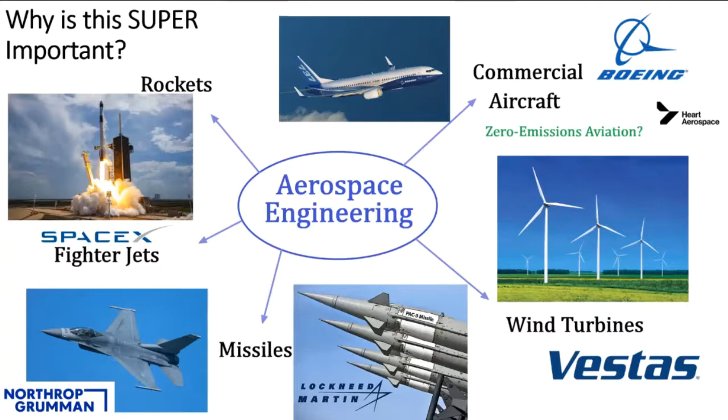Wright Stuff is an event in which you build a plane, usually out of balsa wood because it has to be light, and it's powered by a twisted rubber band. This twisted rubber band is called a motor. You can bring up to 2 planes, a couple calculators, tools, and the flight logs to the competition.

Then you launch your plane, and they will record how long it stays in the air, with the objective of making sure it stays in the air the longest amount of time. These planes are defined by several constraints, and if you do not meet them, you will be ranked last. So it's not as bad as being disqualified, but you must follow these constraints.

You are allowed to use essentially any material except for boron filaments. A boron filament is a type of very elastic and strong material, used mostly for the motor. The reason is that boron is toxic, so they want to avoid toxic things and ensure safety.

The plane must weigh at least 8 grams — I guess that's some sort of working constraint there. Ideally you want to minimize the weight of the plane, but they've set a minimum you can't go below. Similarly, they have defined a maximum limit on the length of the wingspan.

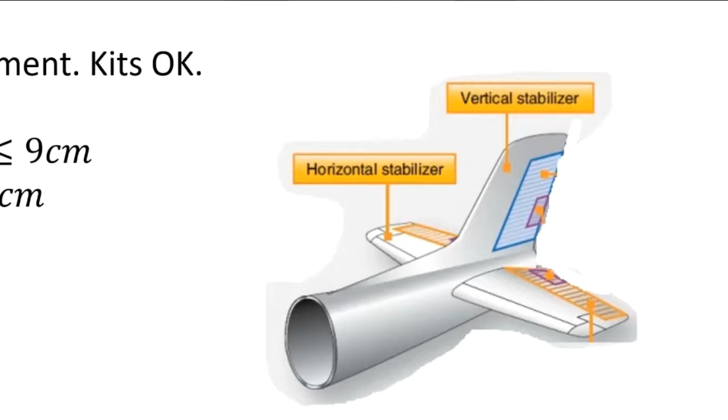There are similar dimensions for the stabilizer. What's the stabilizer? It consists of a small wing and a little rudder, or tip, that points vertically — they're called the horizontal and vertical stabilizer. I'll show you the purpose of these, but what you need to know is that the horizontal stabilizer can be no more than about 28 centimeters, and the vertical about 7 centimeters long.

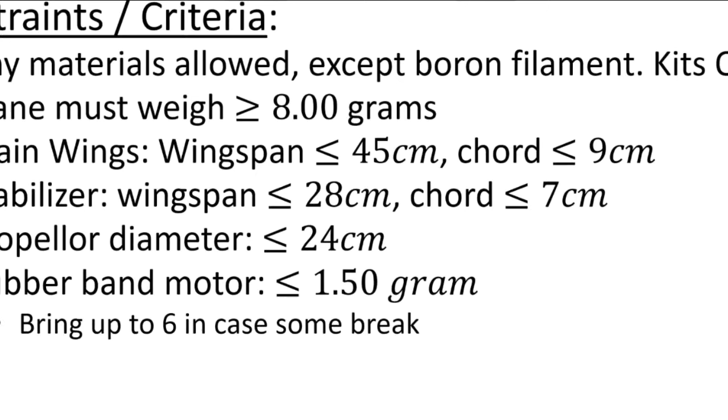The propeller has to be no more than 24 centimeters. Why? Because the bigger the propeller, the more powerful the airplane, so they set a limit to make sure it's not too powerful. Similarly with the rubber band: usually the thicker the band, the stronger you can twist it before it rips, so they set a maximum limit of 1.5 grams.

And you're allowed to bring 6 of these rubber bands in case one breaks. So that's fine.

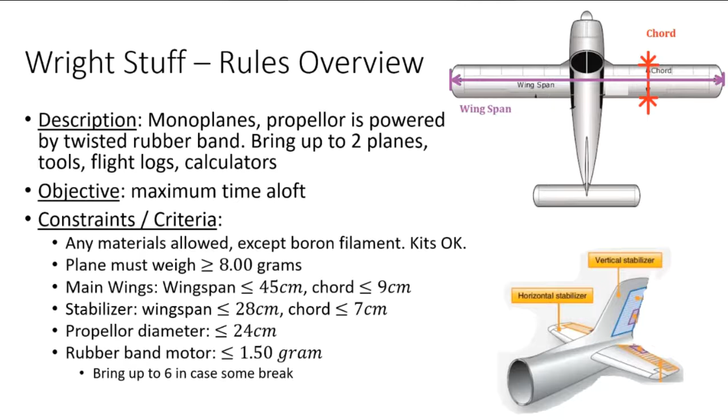If you've seen this picture from the previous introductory build event workshop — the way this airplane is powered, I'll remind you, is that you take a rubber band and twist it. When twisted, it experiences torsional stress and wants to release it. You hook one end to the motor, which is free to rotate around this bearing right here.

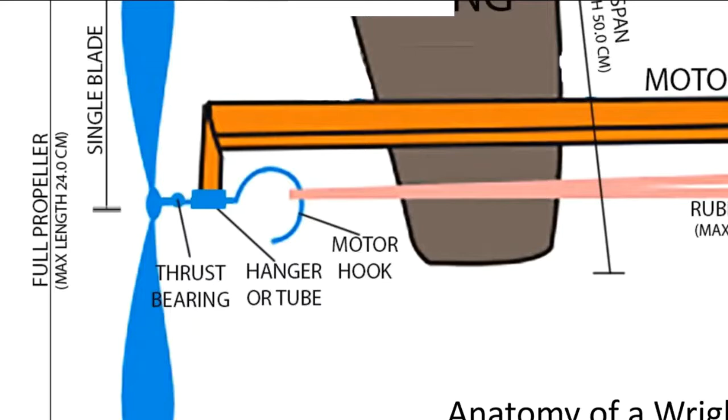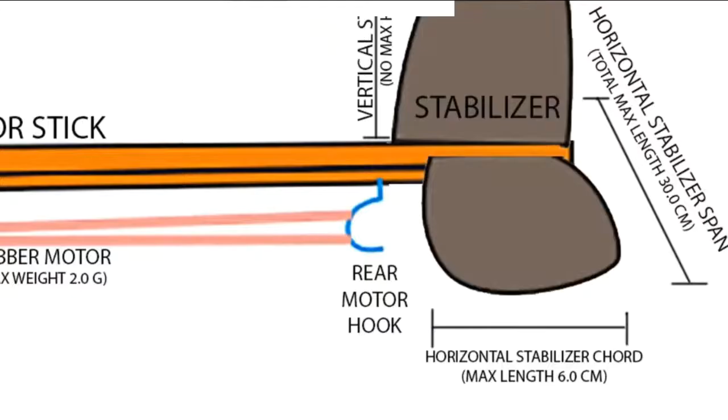But the other end, you hook onto a stationary hook, which cannot move. So you'll have rotation with respect to this hook of the rubber band. That will twist the motor and propel the aircraft forward as the propeller pushes air back.

So there's quite a lot of stuff going on. This picture is quite an oversimplification, but just take a look. This little blue region with the propeller, the thrust bearing, the hanger or tube, and the motor hook, looks like a lot of small details.

Are you sure you can make this yourself? And if you are sure, how about the propeller? Are you going to make that yourself too, or are you going to buy it? So what materials would you think you'd need?

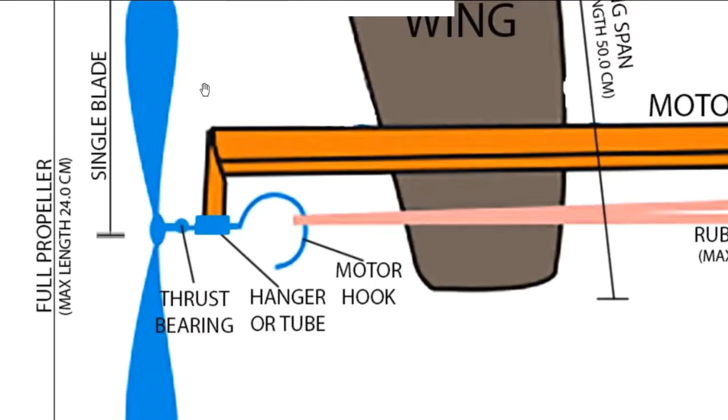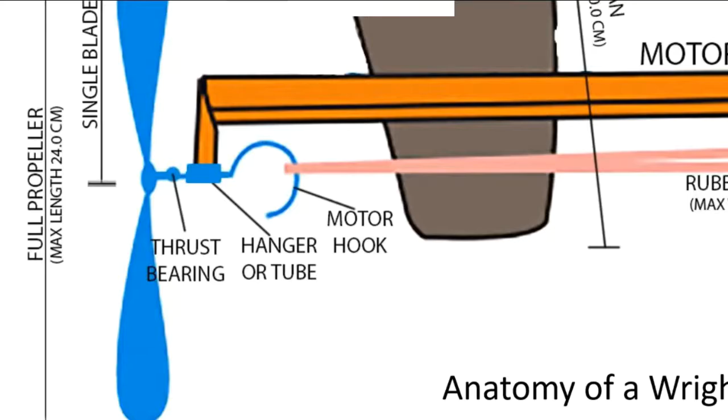Obviously we can't opt for a metal propeller. Even though it's durable, it will be too heavy. And maybe even wood is too heavy of a material to use for the main fuselage. So you run into all sorts of issues if you want to start designing this from scratch.

But fortunately, I guess this problem has been solved before. And what people who have done this before recommend is starting with a kit. I've shown you this previously. This is a picture of what comes inside a Freedom Flight kit for Wright Stuff. They have designed an airplane that meets SciOly rules, and they have enough material to build 2 complete airplanes, and they've really put some thought into the material choices.

So they've made carbon fiber rods. They have mylar sheets for the wings. Essentially, mylar is like a plastic foil, like a plastic shopping bag material, but with aluminum foil coating on one side. So that's what mylar is. It's lightweight and strong, so we can't really make that from scratch.

And they've put some thought into how you can adjust this airplane, because if you build it, it might be that you've applied too much glue somewhere and you need to shift something. So they've put some thought into how you can adjust and slide things around to optimize performance. And to help you build it, they've included instructions for assembling it, along with lots of pictures and lessons in aerodynamics. So if you want to learn this subject in a practical way, this is the place to go.

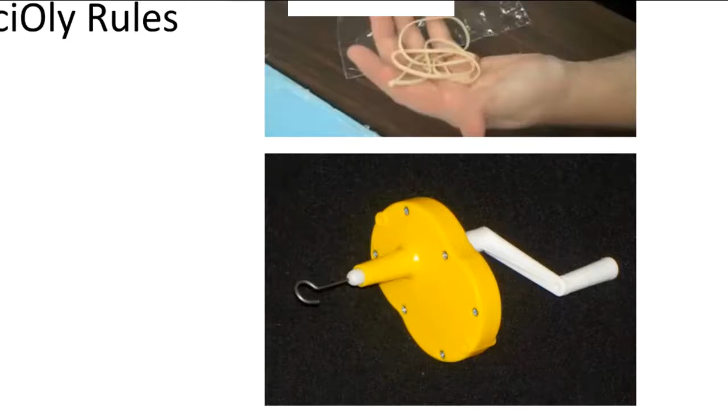So there is a special mechanism that people use. There's a white handle which you use to turn the thing, and a metallic hook. You latch the rubber band onto the motor hook, and the other end you loop over the hook on the winding mechanism, and you turn the white handle many times, maybe several hundred or up to 1,000 times, then remove the rubber band from this hook and latch it onto the rear motor hook. That's the procedure. If this doesn't make sense, it will make sense once you get the parts.

But keep in mind that you would also need to buy this winding tool. It costs about $15, so it's not that much, but it saves a bunch of time. And if you're interested in propellers, the one brand that many people on SciOly recommend is Ikara. If you click on this link, you can get to their webpage and look at stuff.

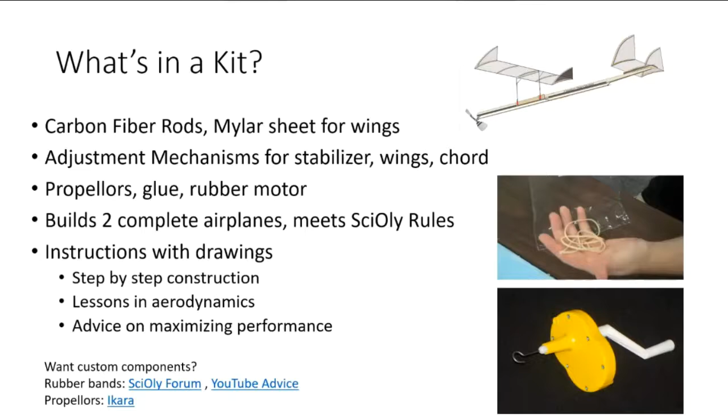Once you build the kit, you'll need lots of patience because it's quite a lot of work. You have to wait for glue to dry, and there are a lot of little things you need to make sure are made just right. Once you've spent a lot of time building this kit, you'll need to spend even more time testing it.

This is how you beat the crowd, because everyone buys the kit essentially, except someone bought it the night before competition. They're not going to really know how to get good performance out of this device. But if you start maybe 2 or 3 months in advance and practice a lot, you can make lots of modifications and understand how each of these three chief parameters affect the flight patterns of the airplane.

Let's start here. You'll notice that the wing is attached to the fuselage, or the main body of the airplane, at 2 points. Those are sliding joints, so there's a bit of friction, but you can move this around forwards and backwards.

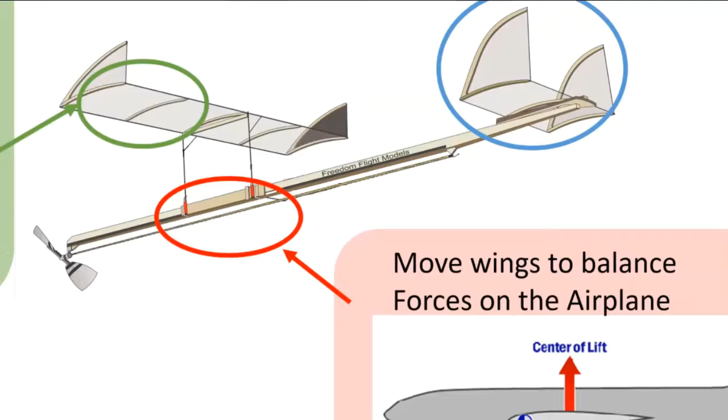That's important because by moving the wing, you're moving where the center of lift is and where the center of gravity is. So you're adjusting the position of the forces that are supposed to balance out on the airplane. By moving around the wing, you adjust the center of lift and center of gravity, and it's important that these forces are balanced out. You don't want too much force on one side, or else the airplane could tip over.

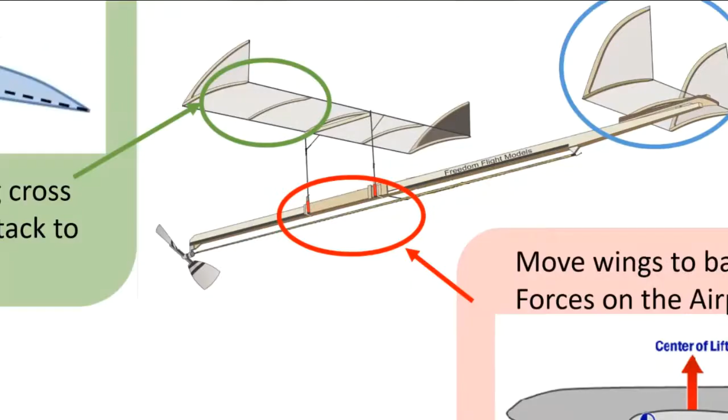The next moment we want to talk about is the wing. The design of the cross-section of the wing, or the aerofoil, affects how much lift and drag you'll have. Engineers spend a lot of time improving these designs, but the basic shape is like a stretched out teardrop shape. By varying the length of this aerofoil, its cross section, and the angle at which it's inclined, you can tilt your wing to be horizontal or tilted up. That's the angle of attack. By adjusting this, you can optimize or control how much lift force your wings are producing.

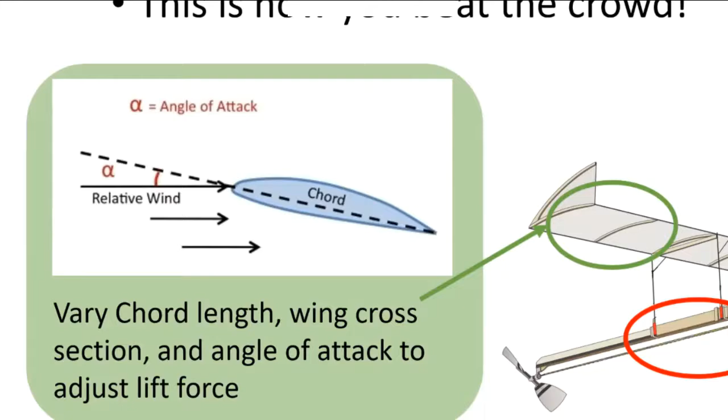And finally, at the back here, you have this stabilizer. This is basically another wing with a rudder. A rudder is used to steer objects traveling through fluids.

If you've been kayaking or looked at boats, you know what a rudder is. Let's say you're looking at the boat from the front, into the camera. In the back there's a rudder, which can flap to one side, the other side, or stay neutral. If you flap the rudder to this side and the boat moves forward, the water pushes against it like a barrier. Since the rudder has some distance from the main body, there will be a torque that rotates the boat. So if you flap the rudder this way, your boat turns this way, and if you flap it the other way, your boat turns the other way.

So why do you need a rudder? It's because your airplane isn't going to fly in a straight line. You're constrained to a gym, which we can imagine as a rectangle, so to maximize flight time, your airplane has to fly in circles. By controlling the angle at which you turn the rudder, you control the radius of curvature you fly. It's important to optimize this because airplanes aren't good at flying in small circles - they waste a lot of energy turning. But you can't fly in too big a circle either, or you'll bump into the wall. So you need to control the rudder angles.

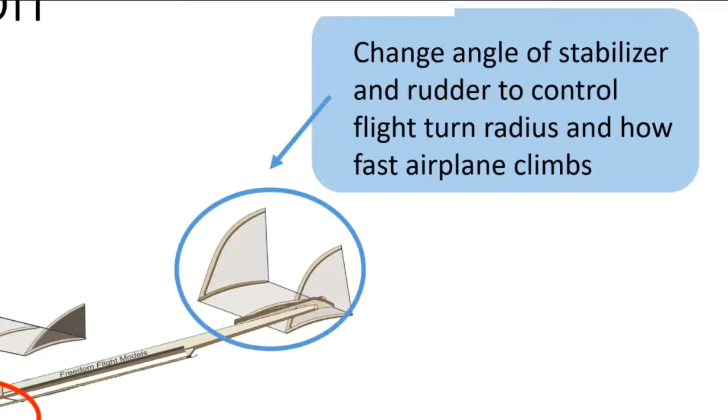Another interesting note is that the stabilizer is designed to push down on the airplane. That's important because you need to stabilize all the forces and moments acting on the airplane. If you've seen how levers work, you can imagine this airplane like a lever with the fulcrum at the center of gravity. There's a center of lift, which is the force the wings produce, acting here. But looking at this picture, if there were no stabilizer, the center of lift would cause the airplane to tilt down, because it's pulling up behind the center of gravity.

That's why you need a stabilizer to push it back down and keep the airplane level. If you don't have a balance between the stabilizer's force and the lift force, your airplane could fly up as you launch it, but so high that it can't generate enough lift, so it falls down. I've seen this happen many times: you launch the airplane, it goes steep up, then falls, then steep up again and falls, repeatedly. It wastes a lot of energy climbing instead of traveling forward, because it's increasing its potential gravitational energy instead of overcoming frictional losses.

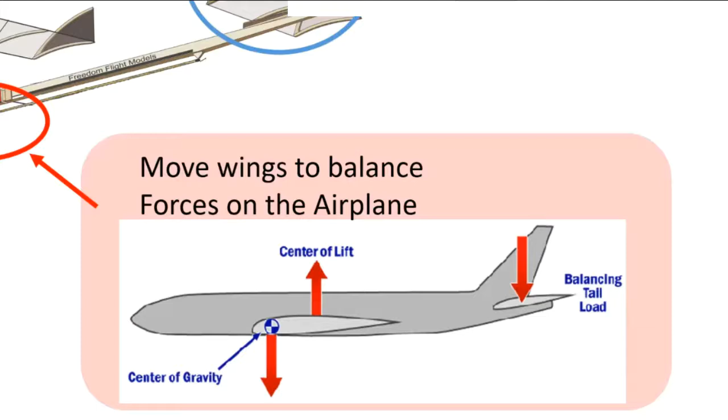So that's why it's important to optimize things. If you just build this thing and hope it works, it won't.

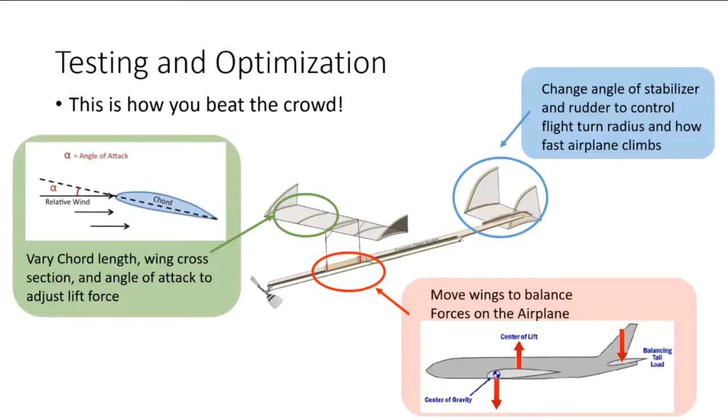My next topic is how to approach this problem systematically. If you just start changing things around, hoping it works or guesstimating, you'll lose track of the adjustments you've made. That's why this event requires you to bring a prep or flight log. You might think this is extra work, but it's actually a blessing in disguise. The point of these flight logs is to help you collect the data you need to improve your design, since you can't really store all of this in your head.

The Science Olympiad competition requires 3 parameters: the length of the motor or rubber band before you wind it up, the number of turns on the motor, and the time your airplane has been flying. There are 3 more required parameters, but you're free to choose which ones.

One example they gave was the estimated maximum height — if your airplane is supposed to fly in loops, it's how high it goes on the spiral before it starts descending.

Another one is the torque of the motor at landing, or the number of turns left in the motor. Essentially, if your airplane was flying and flying and then it crashed, and you lift the motor up when you walk to it and the propeller starts spinning, that means if it hadn't crashed, it could have continued to fly — so you didn't utilize the full potential of the motor. I think they want you to try recording that.

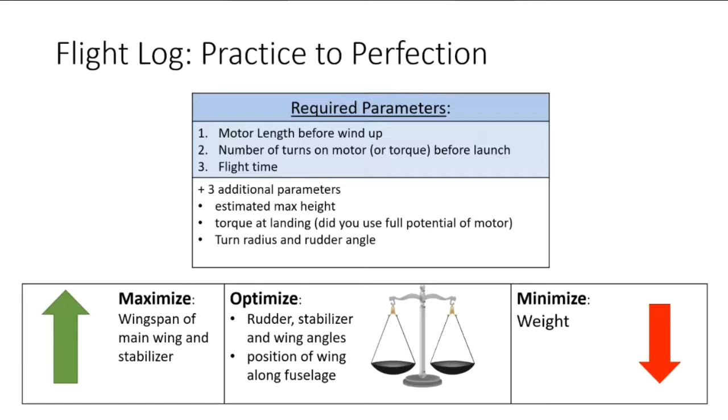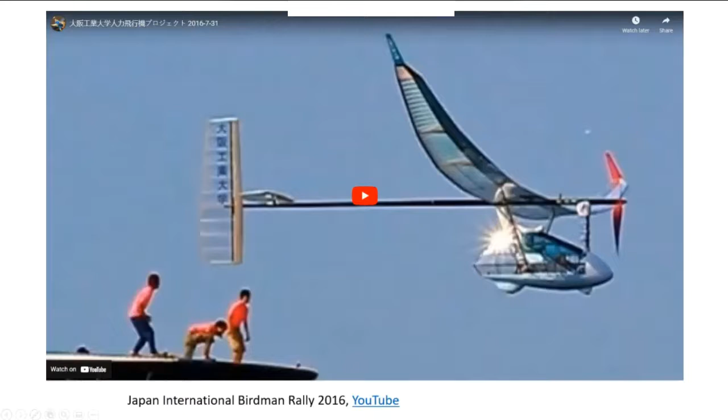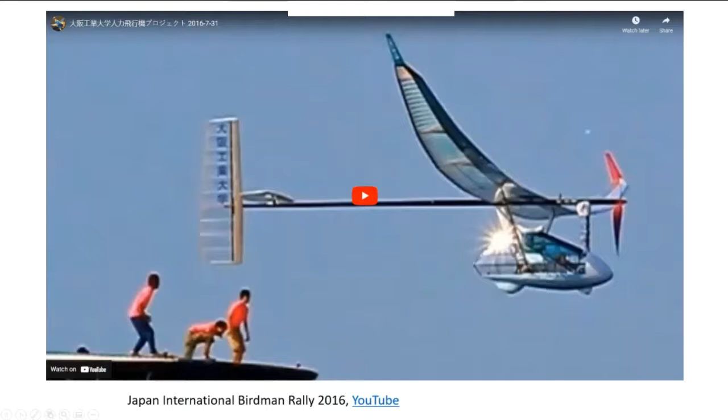So I guess that's the important stuff I wanted to say. I wanted to motivate you, or just show you something awesome I found while preparing for this presentation. I want to show you a video of people building human-powered aircraft. What you do is put a person inside this pod, and there are two pedals, and the person pushes them like you would a bike, and that turns a chain and transmission, and that drives the propeller.

So you can literally fly, except you have to sit in a contraption. But there's no motor, you have to push the wheels yourself. People make pretty awesome things in their spare time, just like you could if you do this event. Anyways, if you want to learn more, this thing is called the International Birdman Rally. I think it's mostly done in Japan, but these things have been going on since like the 30s, the 70s, basically. Anyways, I hope you enjoy. I'll grab a drink of water while you watch this video.

So those people, I think, are the ones who built the device.